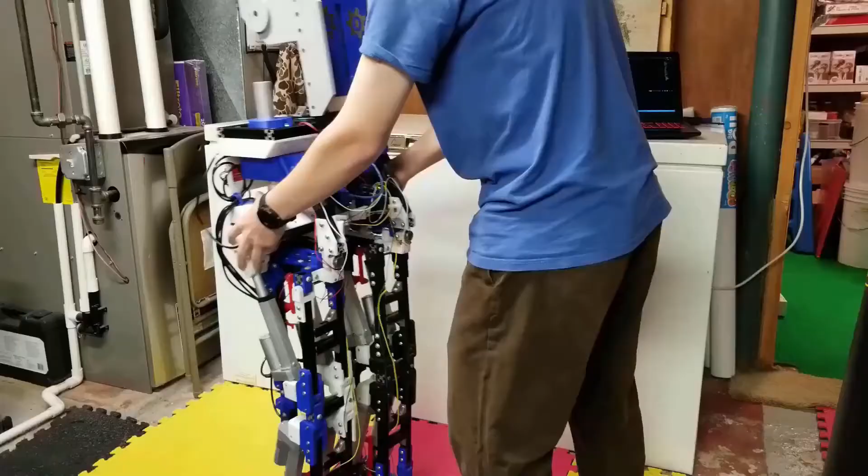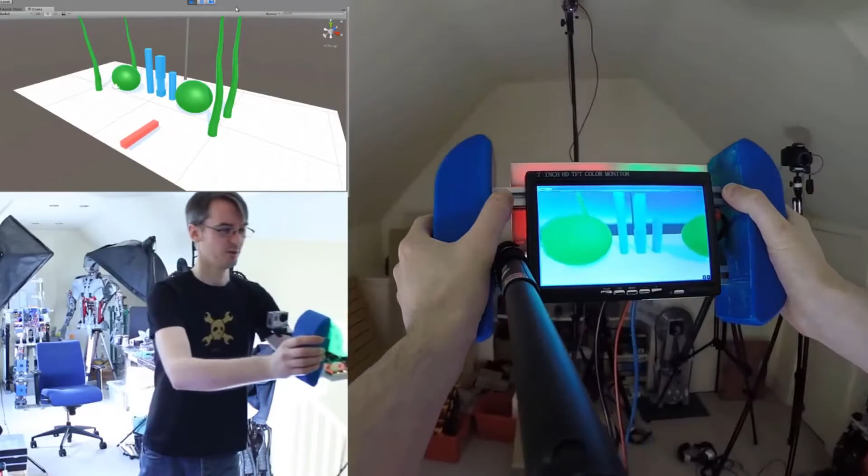This series is a continuation of James Bruton's homemade VR series. He made a VR setup using an Arduino, a Pixy Cam, and a lot of trigonometry. He eventually got an HTC Vive though, so the project kind of ended. Today's video is episode 4 of this overarching homemade VR project, and you can find a link to the first video of the series by him in the description below.

James has let me continue this project, but we're going to be taking things from a slightly different angle. Get it? Angle, trigonometry? Okay. In a minute, I'll show you the CAD of a VR remote that I've been prototyping.

But before that, just so we're all on the same page, a 3 Degrees of Freedom setup like Google Cardboard is like a 360-degree video. You can rotate around, but you can't move. A 6 Degrees of Freedom setup like the HTC Vive gives you an area of space where you can literally walk around virtual objects. Through the research I've done, I've discovered that there are 3 main ways to do this, either using a gyroscope, a camera, or a lighthouse.

A gyroscope setup is like using a Wii Motion Plus remote. Like I explained in my telegolf video, the controller reads the gyroscope data and rotates the virtual controller. One step further though, the gyroscope setup will also read acceleration data to try to guess how you're moving around in 3D space. However, like the Wii remote, if you make fast, jerky movements, the controller will lose tracking. So we don't want to use this for our VR setup. 1 down, 2 to go.

So for the gyro method, all you needed was one device, the device you were using, to compute everything. But for these next 2, you need something called a base station. A base station is a device that's stationary in the room that is somehow linked to your VR device. For the camera method, the base station has a special camera called an infrared or IR camera that mainly just sees IR LEDs. Once we find these IR points, we can triangulate the position of the VR device. And if we do this every frame, we get 6 degrees of freedom movement.

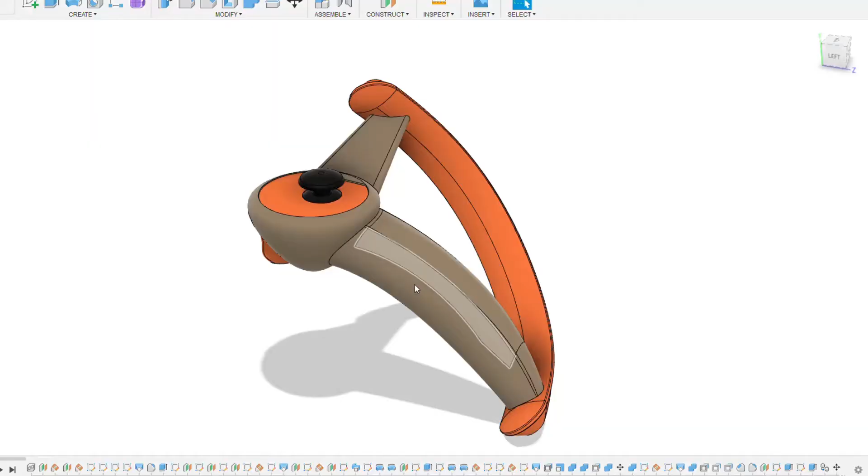I use Fusion 360 to CAD my designs because it's the best CAD software. So in here, you can see my design for our VR controller. I'm not going to go deep into it this time because I still have more to design, but here's the gist. It's based off the Valve Index VR controller, and there actually was a download for a rough 3D model of their controller. But nah, I wanted to make my own.

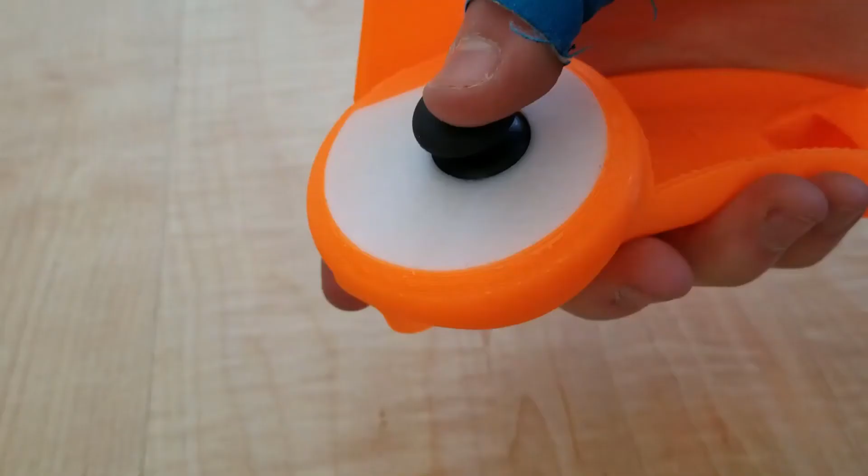So over the past week, I've made a lot of different prototypes of the controller in order to make the tolerances just right. And to be honest, I'm really happy with it. It feels great in my hand. I love the feel of the trigger and the joystick tolerances. It's all working out really well. And this arc on the side here will be just perfect for our design for the IR lights.

Speaking of which, in the next episode, we're going to be taking a look at my ideas of how to make this tracking system work, and we might even have some rudimentary tracking working.